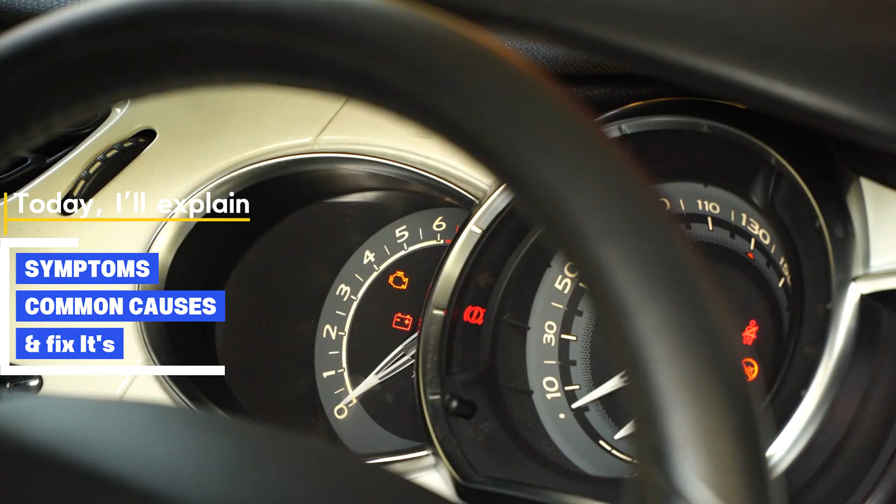If your Mercedes-Benz check engine light is on and your scanner shows P0349, don't ignore it. In this video, I'll explain what P0349 means, the most common causes, symptoms you may notice, and how to fix it, step by step. Let's get started.

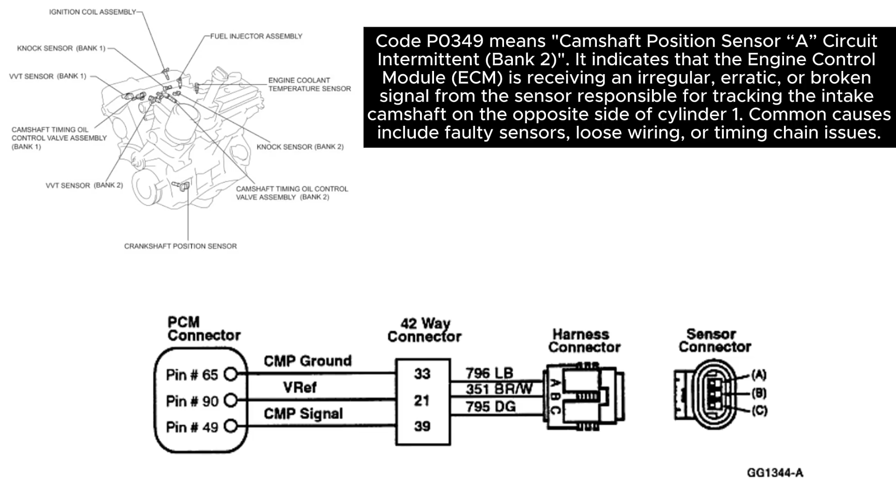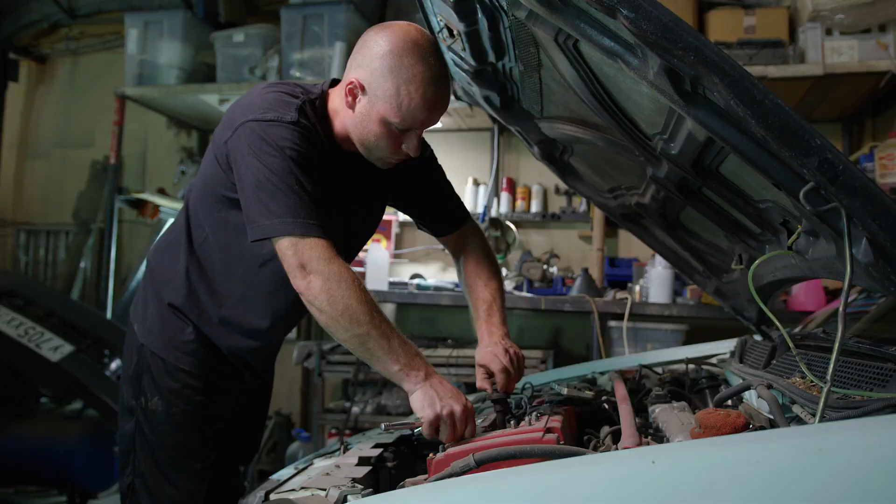P0349 stands for Camshaft Position Sensor Circuit Intermittent Bank 2. This means the engine control module (ECM) is receiving an unstable or intermittent signal from the camshaft position sensor on bank 2 of the engine. Bank 2 refers to the side of the engine that does not contain cylinder number 1. The camshaft position sensor helps control fuel injection timing, ignition timing, and engine synchronization. If the signal drops in and out, the engine performance suffers.

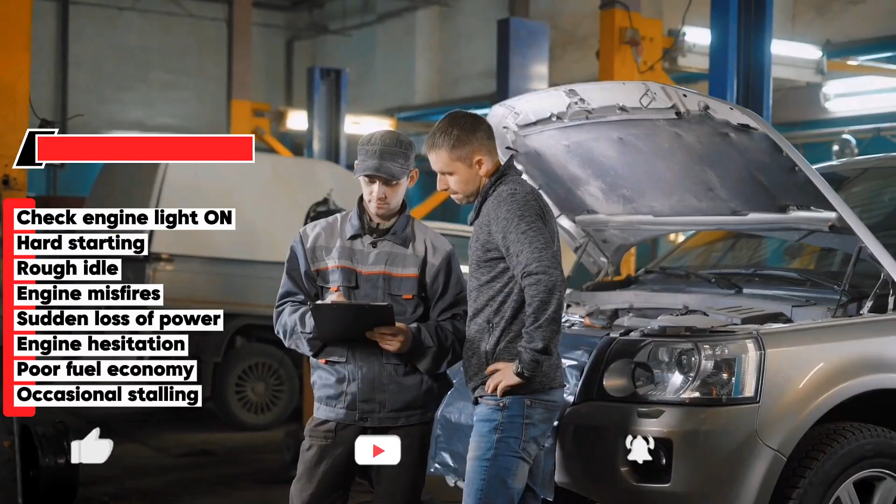With Mercedes-Benz P0349, you may experience check engine light on, hard starting, rough idle, engine misfires, sudden loss of power, engine hesitation, poor fuel economy, and occasional stalling, because this is an intermittent fault.

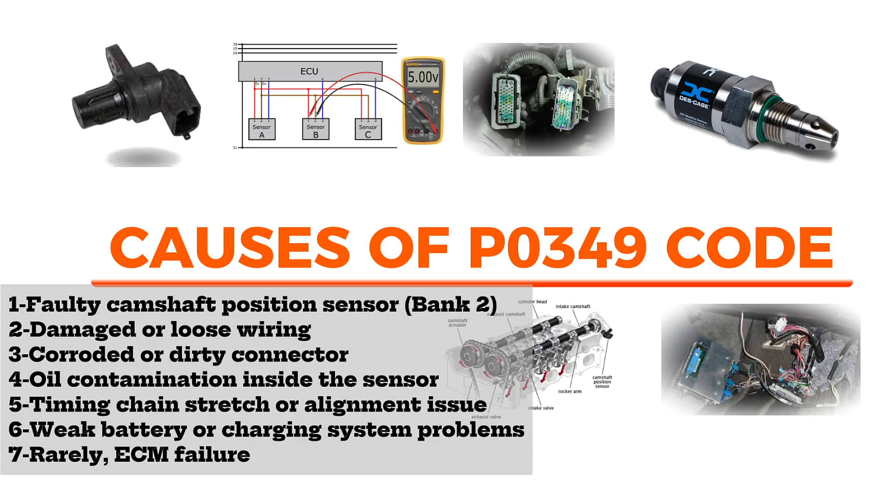Here are the most common causes. 1, faulty camshaft position sensor, bank 2; 2, damaged or loose wiring; 3, corroded or dirty connector; 4, oil contamination inside the sensor; 5, timing chain stretch or alignment issue; 6, weak battery or charging system problems; 7, rarely, ECM failure. It means that the engine control module detected the engine camshaft position sensor circuit is not within specifications.

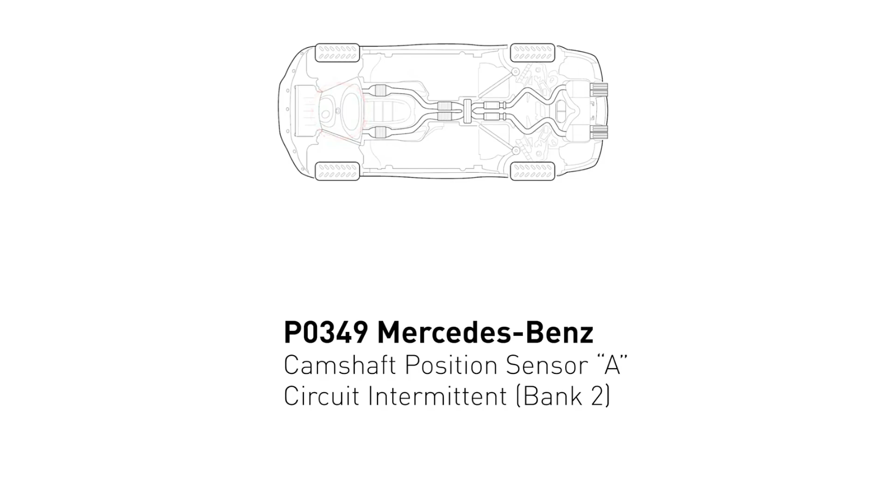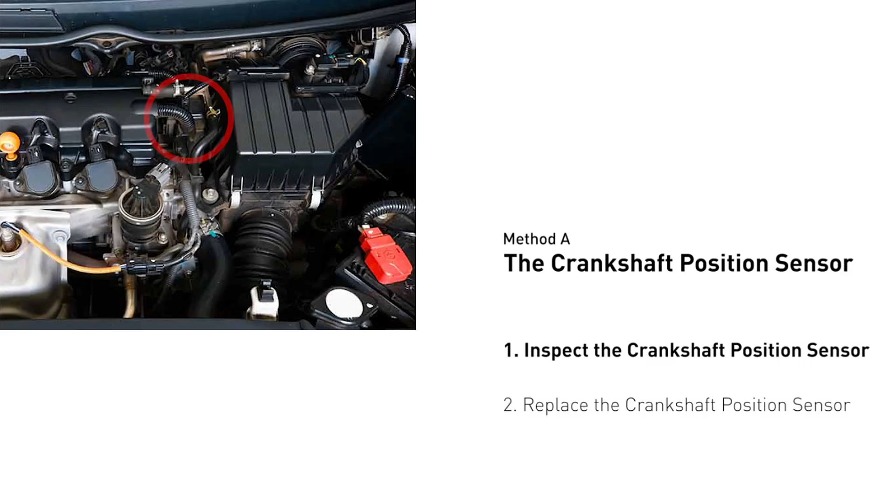Here are 2 of the most practical solutions to fix Mercedes-Benz's P0349 error code. Method A. The crankshaft position sensor. The crankshaft sensor is most often located on the front underside of the engine. It can usually be found mounted to the timing cover. First, carefully remove the crankshaft position sensor from the vehicle. Visually inspect the sensor to make sure it hasn't been contaminated by a leak from another engine component.

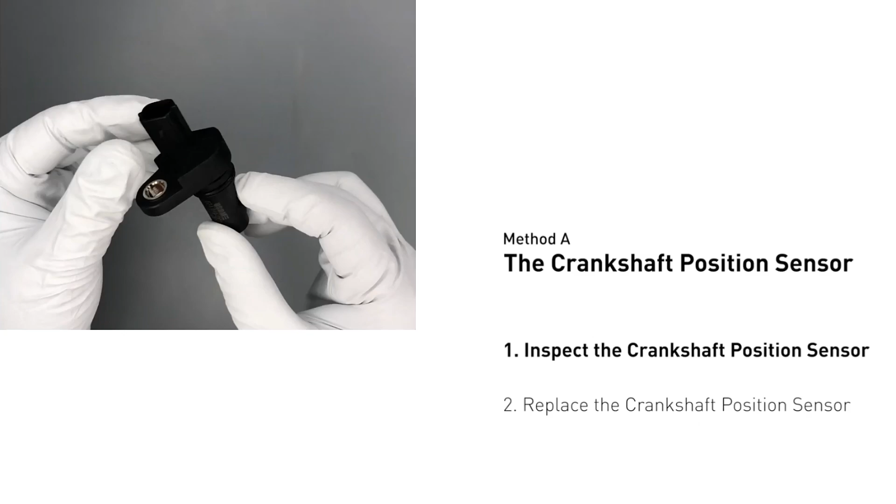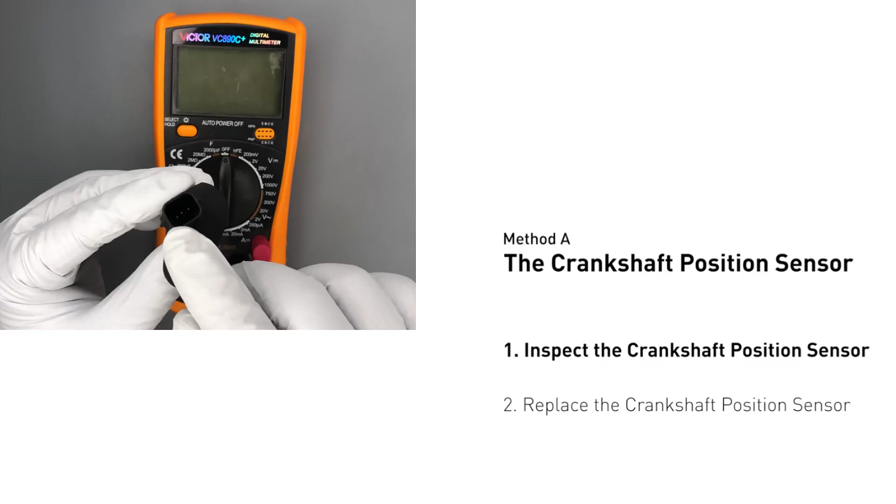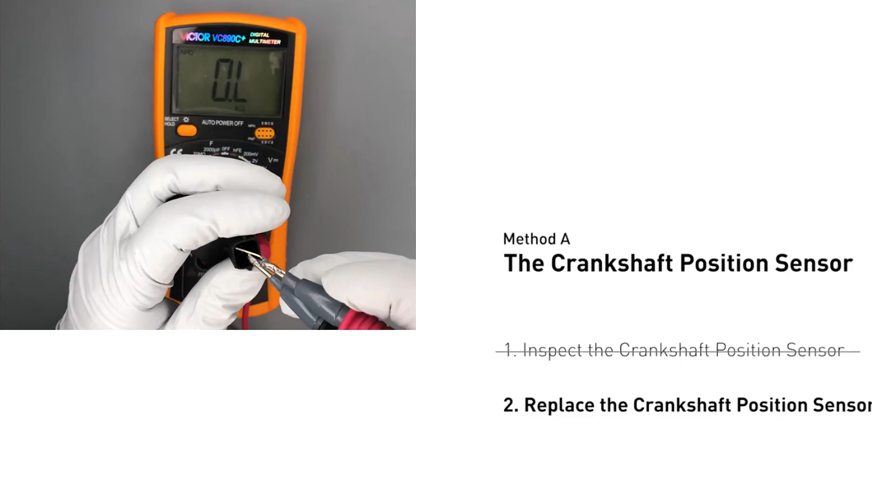Use a multimeter to proceed with a resistance test on the crankshaft position sensor. In order to get a correct reading, check your owner's manual to see the specific crankshaft position sensor resistance range for your vehicle. If you don't get a reading, this indicates that the crankshaft position sensor is faulty and needs to be replaced. Check to make sure the O-ring from the sensor hasn't fallen into its hole. Then replace it with a new crankshaft position sensor.

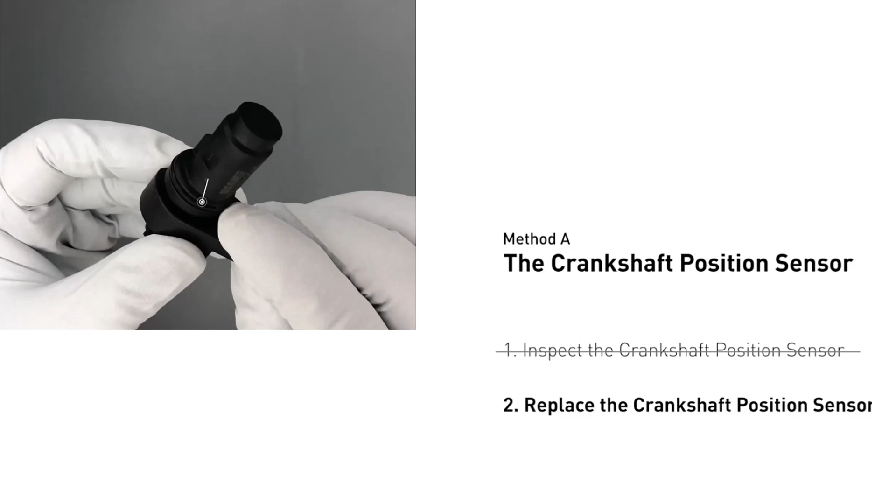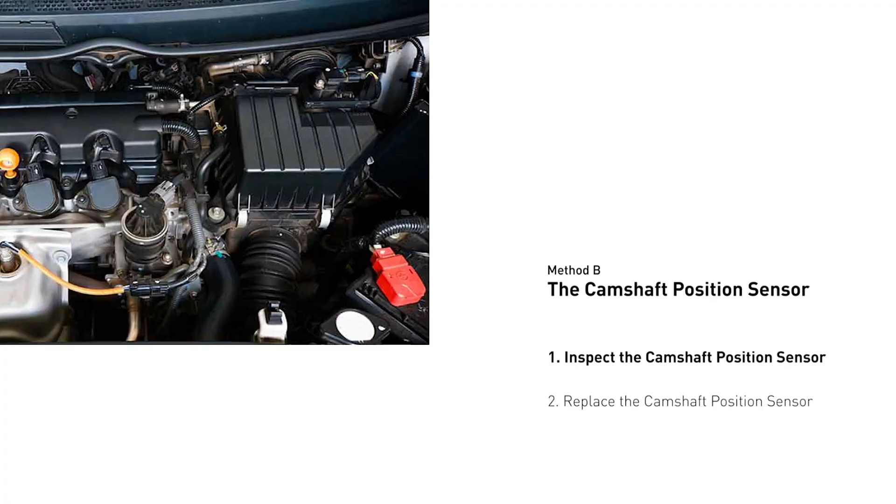Method B. The camshaft position sensor. The camshaft position sensor is located in the valve cover near the top of the engine, or it can be located at the front or rear of the cylinder head. First, carefully remove the camshaft position sensor from the vehicle. Visually inspect the sensor to make sure it hasn't been contaminated by a leak from another engine component.

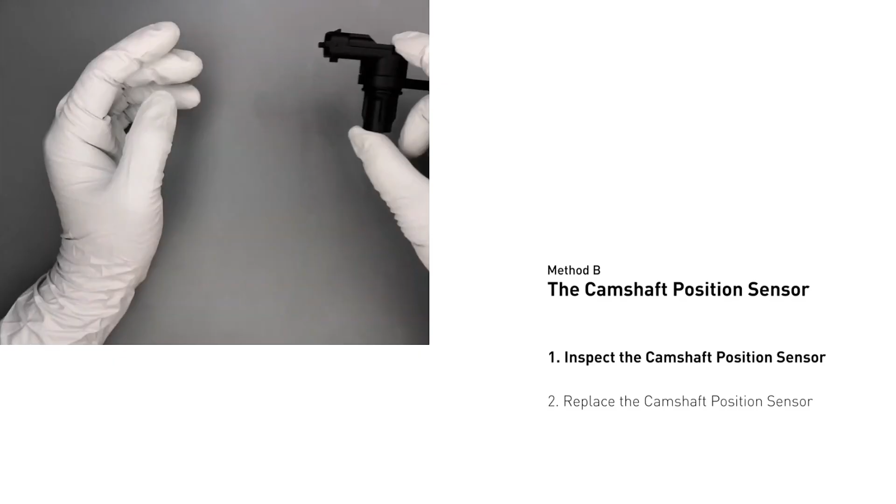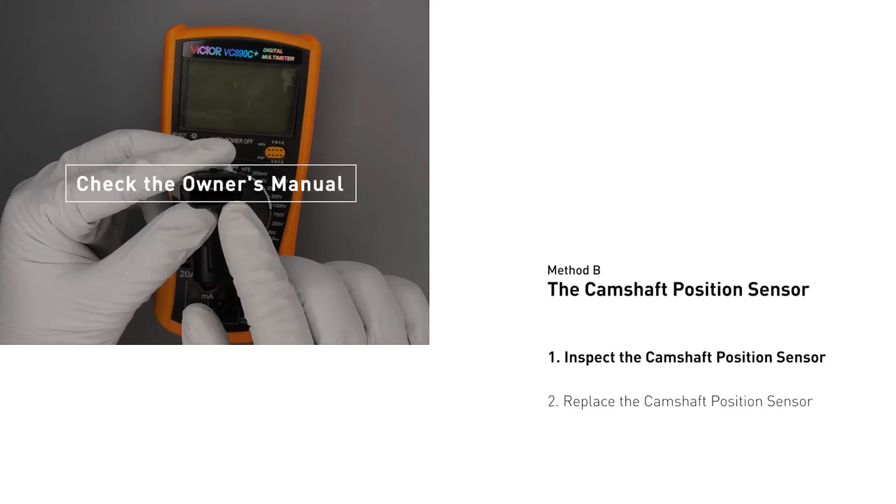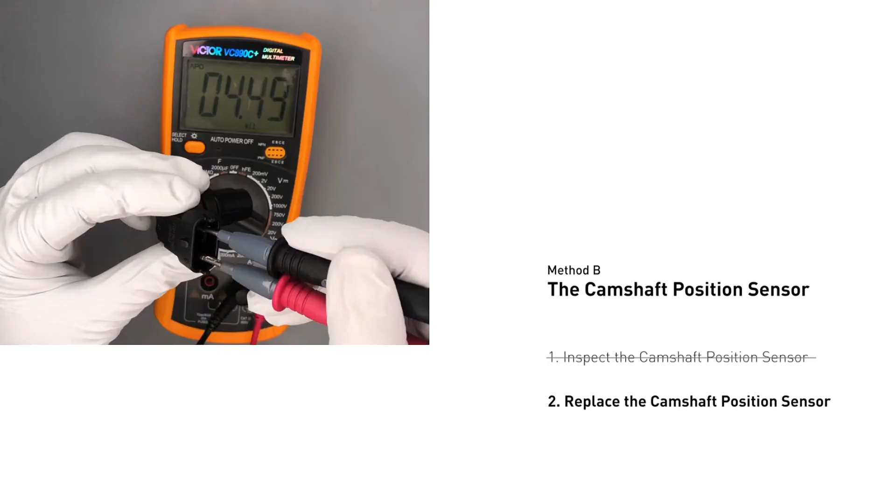Use a multimeter to proceed with a test on the camshaft position sensor. In order to get a correct reading, check your owner's manual to see the specific camshaft position sensor resistance range for your vehicle. If you do not get a reading, this indicates that the camshaft position sensor is faulty and needs to be replaced. Check to make sure the O-ring from the sensor hasn't fallen into its hole, and replace it with a new camshaft position sensor.

So here are 2 of the most practical solutions to fix Mercedes-Benz's P0349 error code. After the repair, you can now use the OBD scanner to clear the error code, and tap the rescan button one more time to make sure everything is fine with your vehicle.